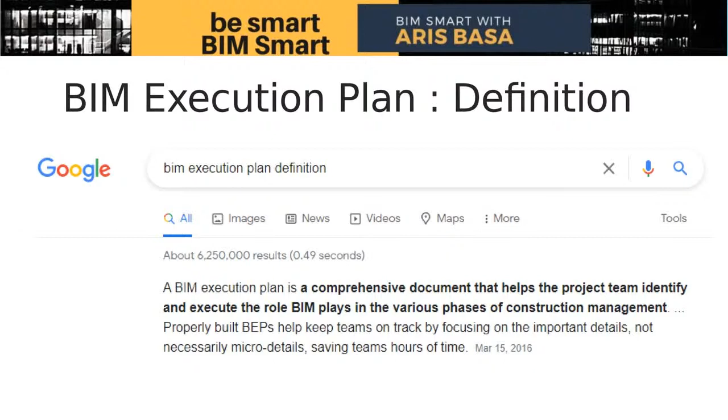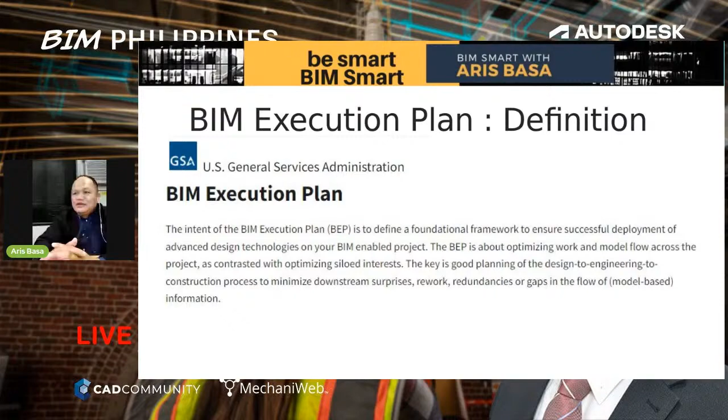Let's continue. Let's not be unfair, not just looking at Google. So if you can see, I've referenced the U.S. General Services Administration, stateside.

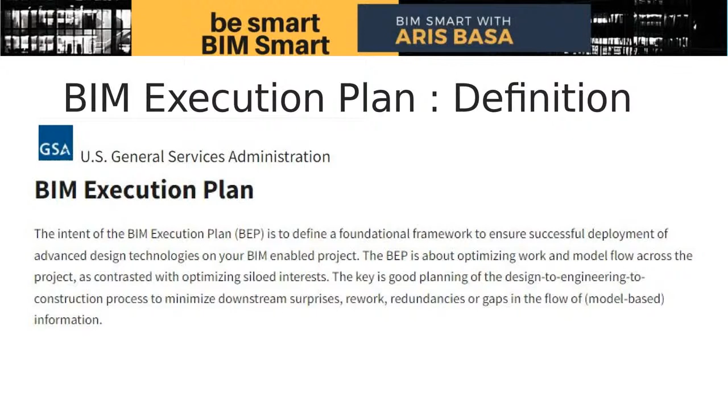They define BIM execution plan as a foundational framework to ensure successful deployment of advanced design technologies on a BIM-enabled project. The BEP is about optimizing work and model flow across the project. The key is good planning of the design to engineering to construction process to minimize downstream surprises, rework, redundancies, or gaps in the flow of information. Well said, from the U.S. General Services Administration.

Let's continue. Of course, if you've referenced US, you have to reference UK as well. According to the UK BIM Alliance, which is the main BIM body in the United Kingdom or England, the BIM execution plan is a technical response developed by the project delivery team.

A project delivery team is composed of, one, the owner or the owner representative. Second is the consultant or consultants, which can be the program management consultant, and there could be another construction management consultant. The third one is the builder or the main contractor.

So it addresses the requirements set out in the employer's information requirements, EIR, and confirms the supply chain's capabilities on how and when the project information is to be prepared, by whom, and using what standards and rules in the project. It is mentioned further that it is referencing PAS 1192.

It is now called the ISO 19650. And it further says that the structure of a BEP will usually be based on an established template. A keyword here is templates.

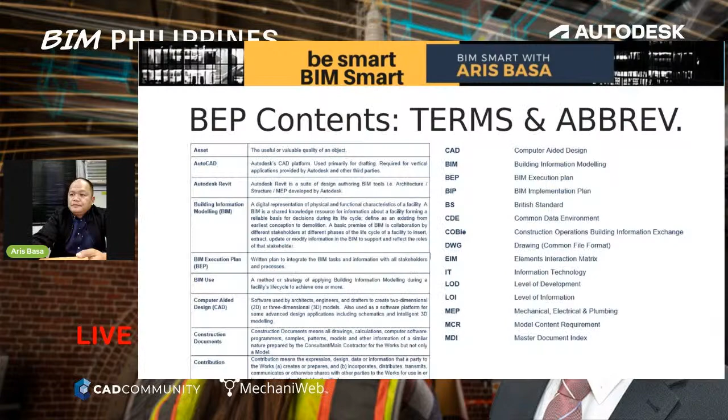So let's start with the contents, the terms and abbreviations. If you're a BIM guy, you've been working on a BIM project for quite some time now, you must be familiar with these terms.

So let's say, for example, the asset is the useful or valuable quality of a project, of an object. You have the construction documents — you know the meaning of these documents. Usually, architects and engineers who have been working in construction are very much familiar with the terms that will be used in the project and the terms that will be shown in the BIM execution plan document.

You know, the abbreviations will be there. CAD, BIM, BEP. Sometimes BEP, BIM execution plan, is also called BXP — it depends on the country. Sometimes it's called BIM PMP, BIM Project Management Plan. But all the same, these are all the same documents comprising all of the strategies, the relevant documents, the standards that are or will be used in the execution of the BIM for a construction project.

Okay, let's proceed. So, in the introduction, the purpose of the document will be clearly identified.

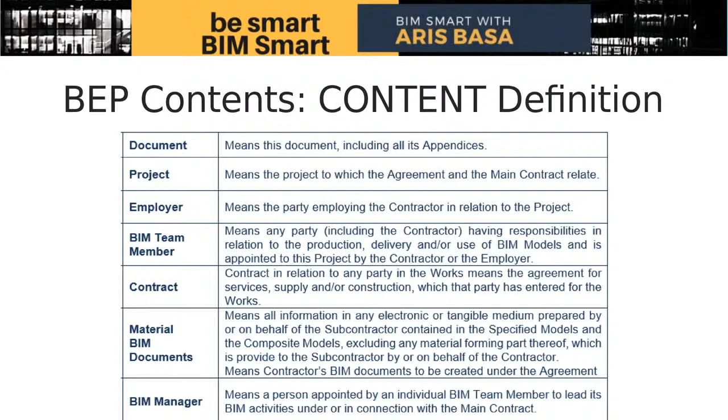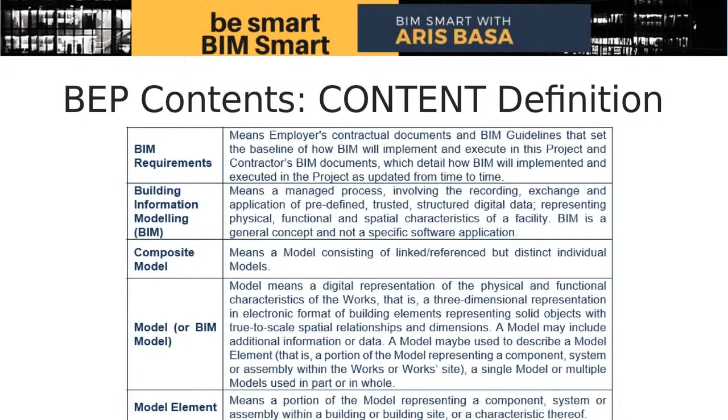Yeah, in the content definition, it is important to define the specific terms that are included in the BIM process. So you'll see that when we say document, it means this document, which is the BIM Execution Plan. And when we say project, the project is referring to the actual project that you are working on. And further, these are the other terms that are usually used or must be shown in the contents of the BIM execution plan.

So let's just define a little bit on the BIM manager. The BIM manager usually leads the BIM team, and he is managing all levels of BIM development. He will be able to produce the general BIM implementation plan. Let me just insert this: for BIM execution plans, usually for construction projects, there are two types of BIM execution plan. One is the pre-contract BIM execution plan.

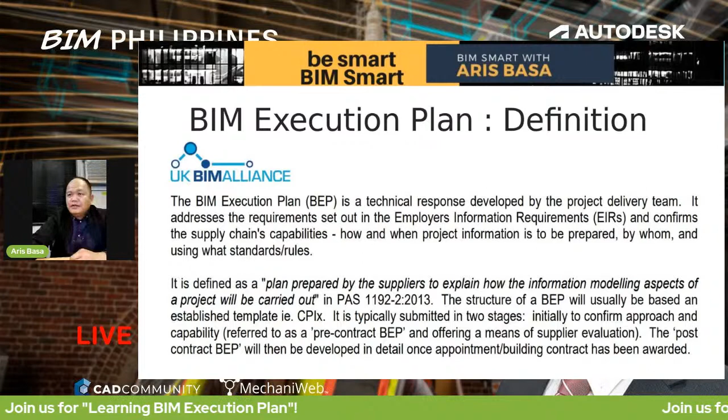Let me go back to my third slide. Yeah, here it is mentioned in the UK BIM Alliance definition of BEP that it is typically submitted in two stages. Initially, to confirm approach and capability, which is referred to as the pre-contract BIM execution plan. The request for a pre-contract BIM execution plan is usually sent out by the building owner or the consultant to the various companies who will be tendering for the project, who will be bidding for the project.

So usually this pre-contract BIM execution plan is a short document, not as detailed as the post-contract BIM execution plan. In my company, what I normally do is I summarize what will be our approach in the execution of the BIM project. Usually, this will be several paragraphs, which is 2 or 3 pages. That would be enough as a pre-contract BIM execution plan.

You just have to make sure on how you will be able to execute BIM for the project that you are bidding. And then, if you win the project, the BIM execution plan that you will be doing is now the post-contract BIM execution plan, which we are discussing right now.

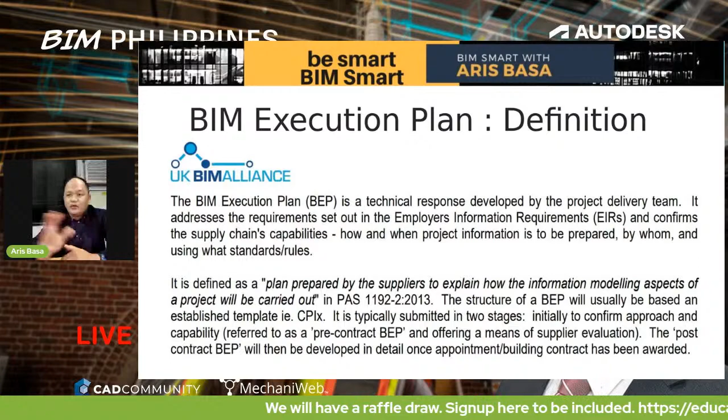Let's go back. Let's move ahead to our roles and responsibilities. We also have what we call BIM leads. Sometimes the BIM leads are based on the disciplines. So there can be a BIM lead for the architectural, structural, interior design, sometimes for the landscape, and of course for the MEP. Similarly, the BIM lead would always have his BIM coordinator.

The BIM coordinator is a guy who can coordinate all of the disciplines. He's like the big support, the big right-hand man of the BIM manager. This is when the project has enough budget to hire a coordinator and a BIM manager as well. In the projects that we have, usually we don't have the BIM coordinator anymore. The BIM manager is working as the BIM coordinator as well.

So you have the BIM engineers. The BIM engineers are basically the discipline engineers who know how the BIM process is executed. And you have the BIM modelers. These are the BIM guys who are hands-on in producing the models and also hands-on in making the necessary shop drawings and as-built drawings for the BIM project.

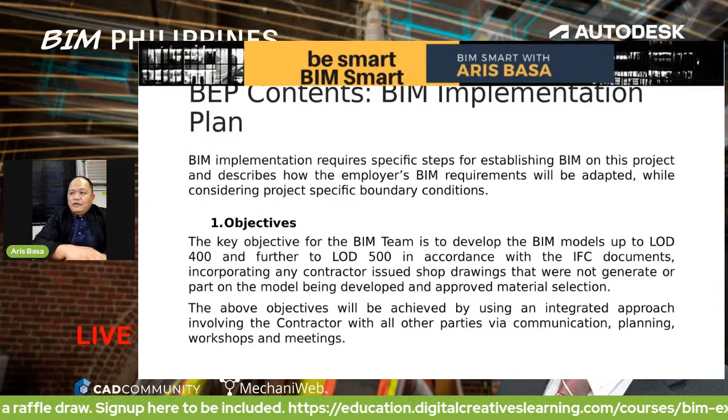Let's continue. So we have also what we call the BIM implementation plan. Let me just read the contents of this. BIM implementation requires specific steps in establishing BIM on the project and describes how the employer's BIM requirements will be adapted while considering project-specific boundary conditions. The objective of this is to develop the BIM model up to LOD 400. So this is specific to the project.

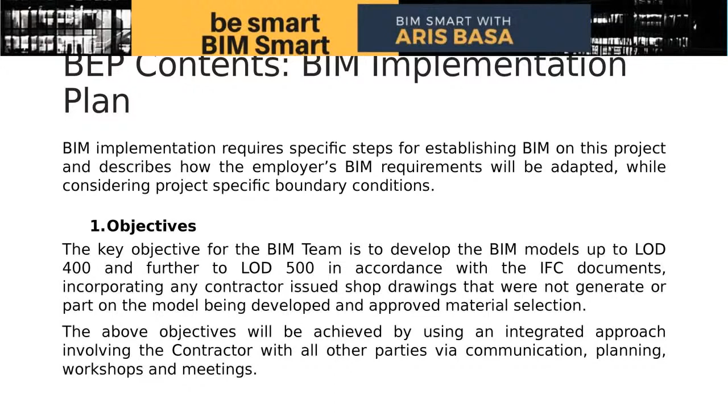For the reference project that I use for this presentation, the task of the BIM team is to develop up to LOD 400 and 500, meaning we already received an LOD 300 model from the designer. In many cases, specifically in the Philippines where BIM is not yet widely used, the consultant or the owner will hand over CAD files for the project. Then the task of the BIM team would be to develop LOD 300 models, 350, 400, and up to 500. So mas maraming trabaho for the BIM team in cases where BIM was not used in the design stage of the project.

So as part of the BIM implementation plan, we have to be very clear on the contents, meaning the settings that will be used for the project. We have to identify the language, if it's going to be done in English, in Urdu, in Arabic or whatever. It has to be clearly stated in the project language.

There's the splash screen. Ano ba yung splash screen? Splash screen is usually the first image that you see when you open a BIM or a Revit project. Usually it will contain the logos of the owner, the project, the consultant, and the contractor, and then it will contain several information such as the model file name, the Revit version, etc.

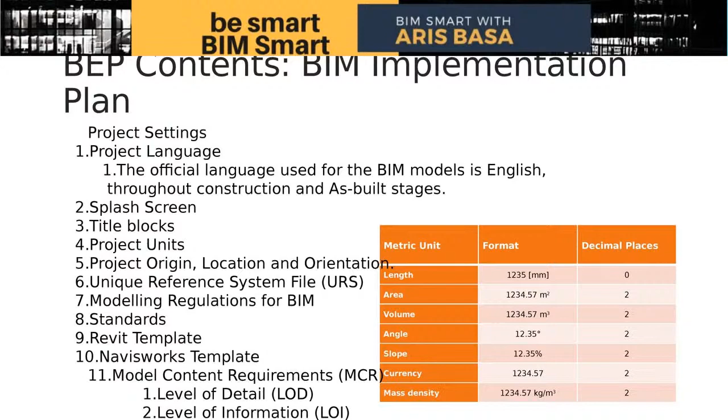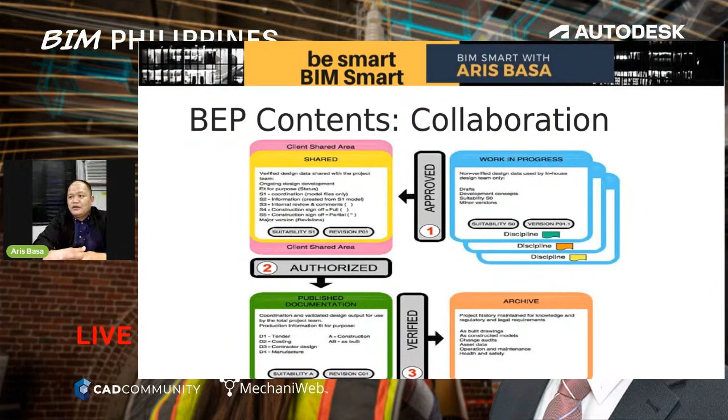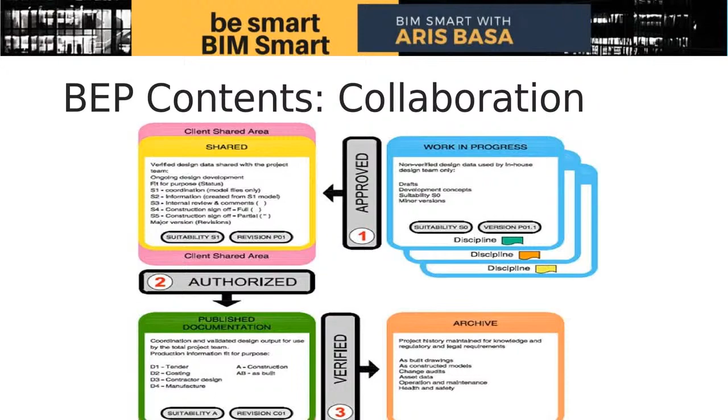Yeah, this is a map showing how we are doing the collaboration of the project. So usually when a work in progress model is approved, then it will be shared to the various entities, the consultant and the owner. If they authorize it, then the document will be published. So the published document is usually the document that will be used in the construction. So after it has been verified, it will be archived and will be used as built for further reference.

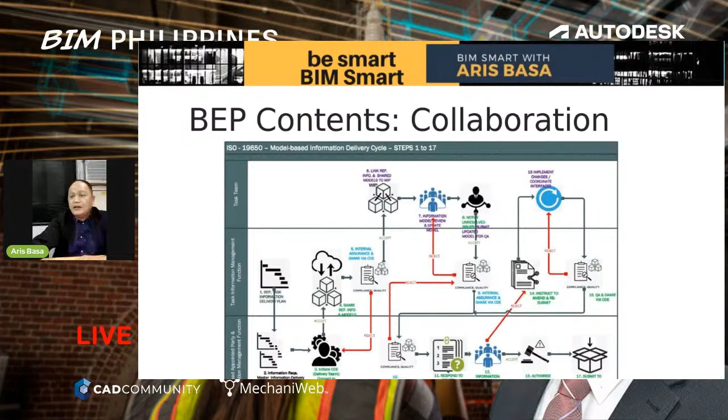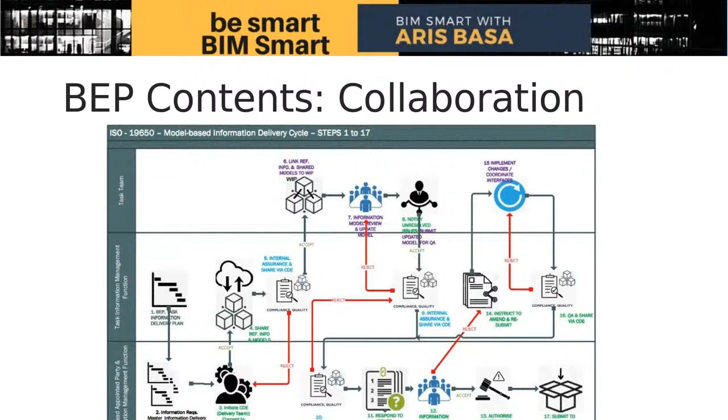This is another process showing the model-based information delivery cycle. It's a 17-step process. This document is taken from the BIM forum. So they might have a newer version of this, which is combining other aspects or other processes. But so far, this is what I'm using in my project.

So we are also defining the contents of the project browser for the project. We have to be very clear on what will be the name of the floor plans that will be used. There will be standard naming conventions for the drawings and for the views and even for the sheets. Now, this has to be very clear at the beginning of the project so that we don't waste so much time in renaming views and renaming sheets in the later part of the project.

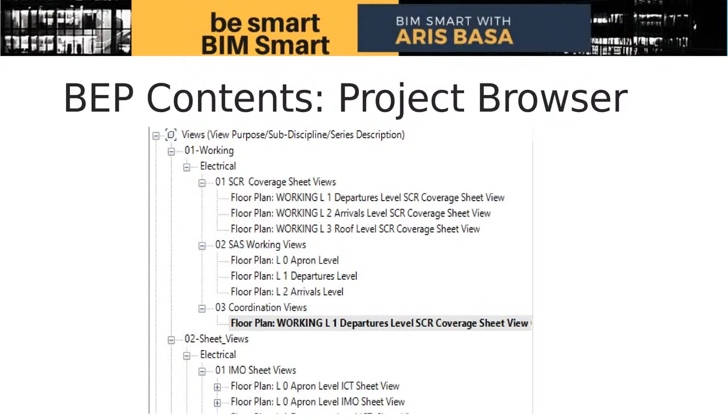And most BIM managers and BIM experts are using Dynamo scripts in preparing these documents, because usually this could be a very detailed document that is better done using Excel, and then incorporating it in Revit using the Dynamo plugin. For those who are Dynamo users, you are very well familiar with this process.

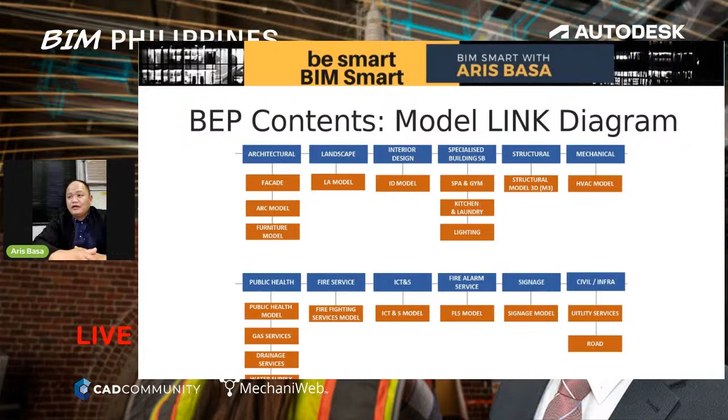Also, in the BIM execution plan, we have to identify and have a clear definition of how models are linked in the project. For example, for the architectural model, you will know what are the models that you need to link for you to have a proper architectural document. So the facade model, you need to include it. You have the architectural model and furniture model, and so forth and so on. Similar to, let's say, for the mechanical, you need to put on the HVAC model if you want to see the engineering design of the project.

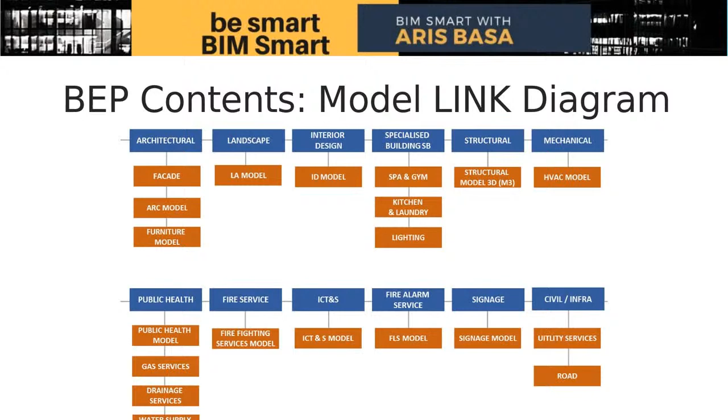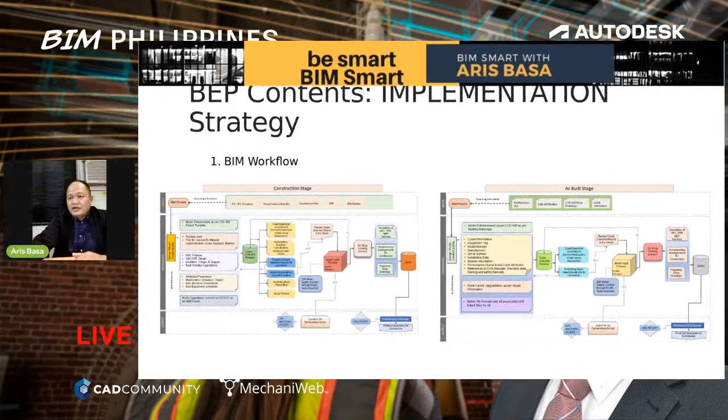Okay, so this is a BIM implementation strategy. It's divided into two workflows. One is shown here on the construction stage, and the other one is during the as-built stage. These workflows are suggested by the BIM forum as well, but depending on the project, these workflows can be modified, can be simplified, so that the work can be straightforward. If there are less BIM staff and less construction management team on the project, then these workflows can be very simple.

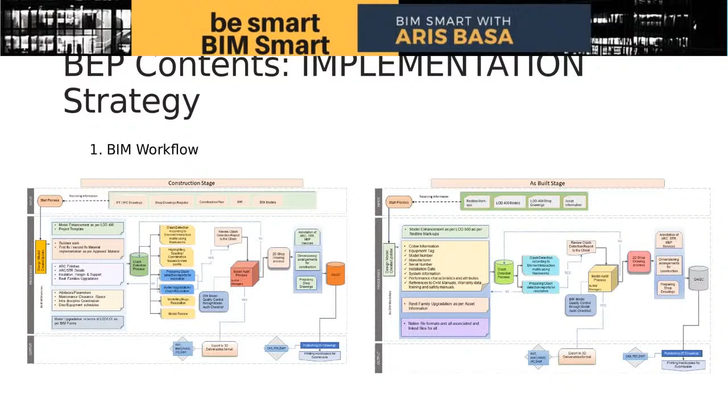So also in the implementation strategy, we need to define the 3D coordination and the clash detection process. Let me just read what is shown in your screen. Although the design authoring process aims at producing consistent design through avoiding clashes by establishing a collaboration environment among design teams, 3D design coordination is still required.

Of course, we are not perfect, no? The people who are doing the BIM are still human beings. We are prone to mistakes. So we still need to talk. We need to collaborate. We need to tell this guy that you have to adjust. Have to tell me if I have some mistake so that I can adjust. This is the collaboration process within the project.

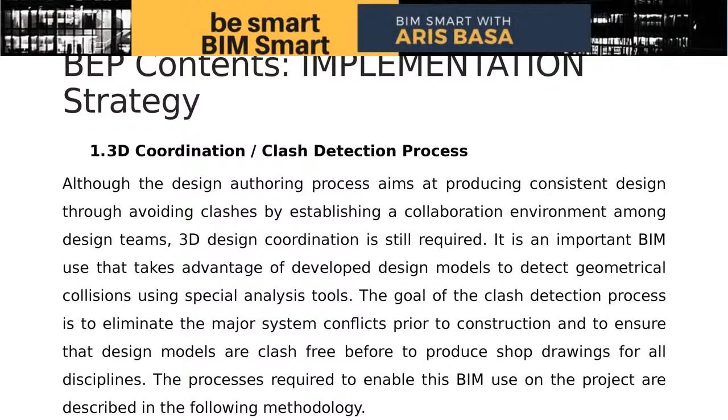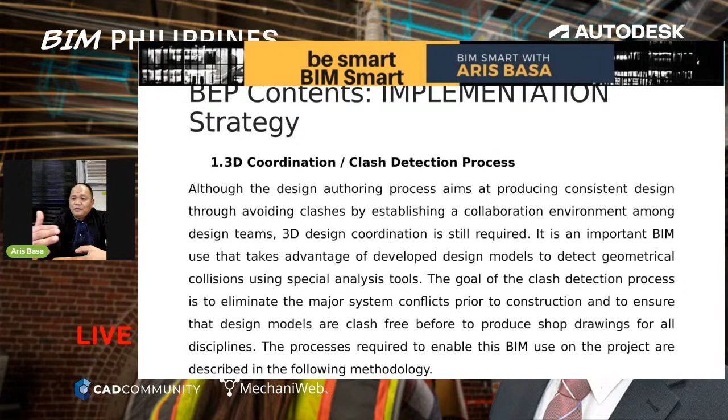So the goal of the process is to eliminate the major system conflicts. For example, you don't want to build the curtain wall which is clashing with your slab and with your columns. These major clashes have to be very well defined. You don't want your AC ducts to be hitting your columns. You want them to be properly mapped out in the three-dimensional model.

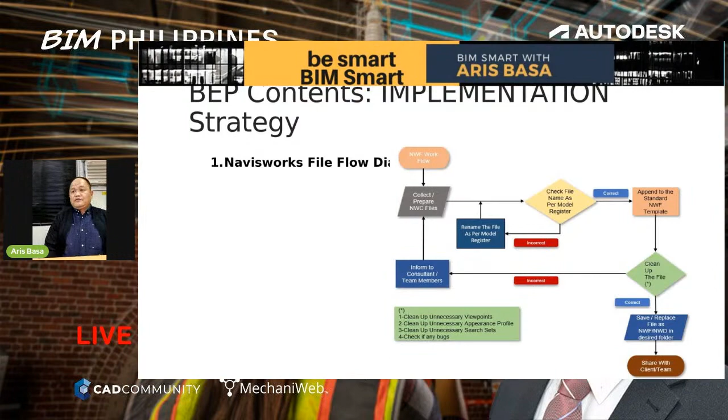Just to clarify, for those who are beginners in BIM, there are two major types of BIM software. One is the BIM authoring software, which is the likes of Revit, then ArchiCAD. You also have AECOsim, among others. These are the tools that you use in creating the model.

The other one is Navisworks, which is a viewer for the project. Not just the viewer, it is also used in clash detection. So it is also used in quantity survey and used in preparation of the 4D model, or what we call the construction sequencing model, among others.

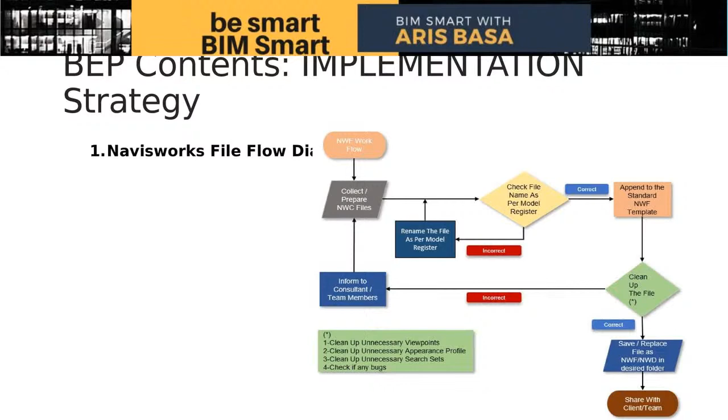We can define the best location for the tower cranes. We can define the best locations to place the temporary site facilities, and we can plan where to put the boundary fences and the temporary roadworks using the BIM software. This also has to be defined inside the BIM execution plan document.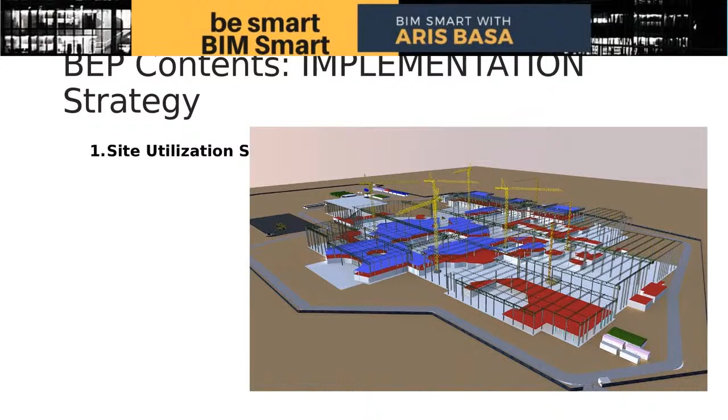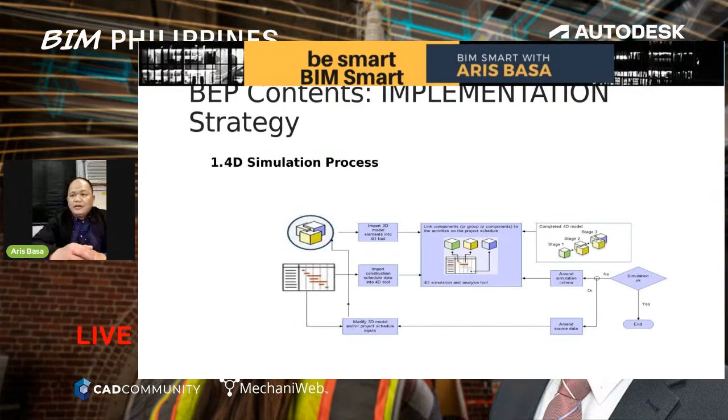So, as I've said earlier, for the simulation, or the sequencing, there is a process, and it is shown in this process. The 4D process requires two things. One is the model, which is developed by the BIM team, and the second one is the program, or the planning information. It can be a Primavera software.

It can be a Microsoft Project software that clearly defines the stages of the project and what is to be completed during each stage. All of this will be incorporated using the Navisworks software, and we'll be able to produce on a monthly or weekly basis the actual construction progress and what we call the planned progress for the project.

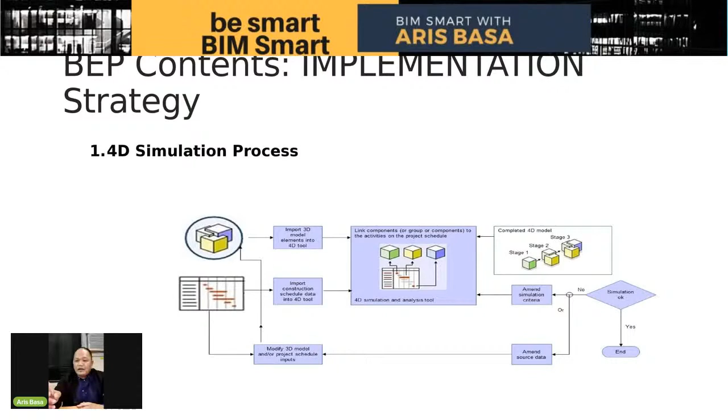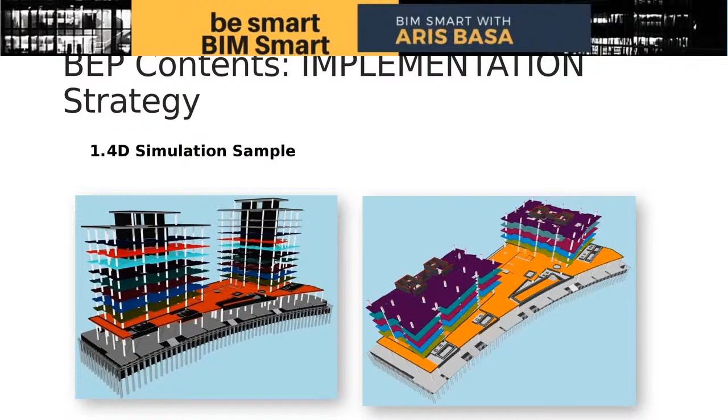I think I have an image showing an example of that. Yes. So these are just some examples of a 4D submission. Usually a 4D submission is submitted as a video file, showing how the project has progressed from day zero up to the current time, and how the project will progress from the current time up to the completion date.

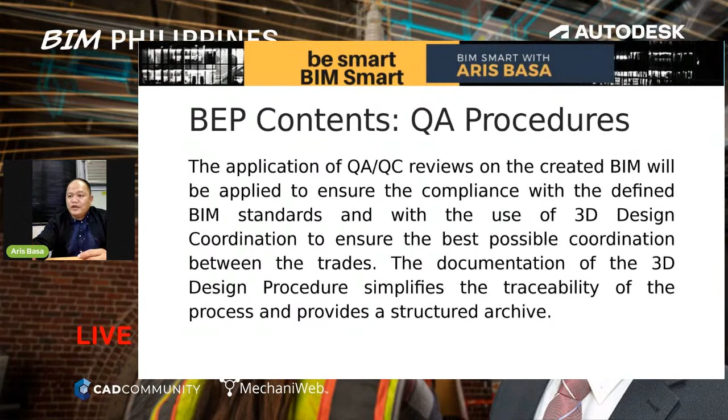Of course, we'll have QA and QC procedures for the BIM execution plan. This QA/QC process is usually done by the BIM team, not the QA/QC team of the project. QA/QC reviews on the created BIM will be applied to ensure compliance with the defined BIM standards, and 3D design coordination is used to ensure the best possible coordination between the trades.

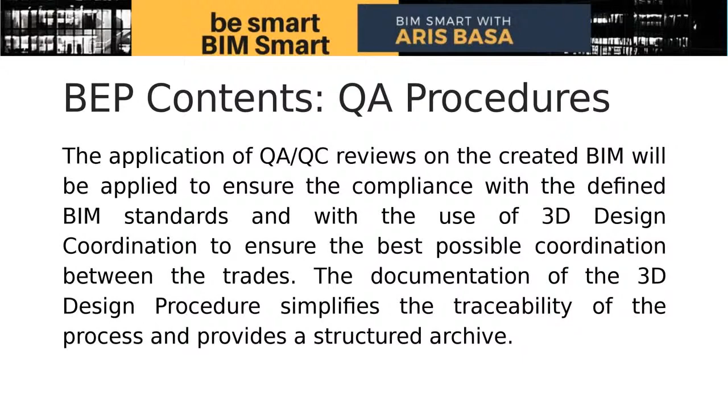The documentation of the 3D design procedures simplifies the traceability of the process and provides a structured archive. So it is very important that we have these QA/QC procedures, and they will be defined in the document. You will have all the checklists and see the compliance of each part of the model, and that is where the BIM manager or BIM coordinator can create comments, which can be further improved by our BIM authoring team.

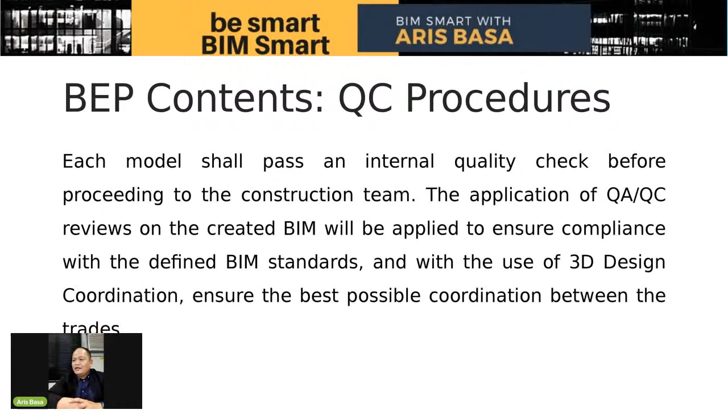In the QC procedures, each model shall pass an internal quality check before proceeding to the construction team. We want to make sure that all our models and all the 2D construction drawings we produce are properly checked before we give them to the construction team. Otherwise, it is going to be a big problem. Usually, our construction team will build as they receive. We don't want to create issues for the construction team. We want to work in a properly and well coordinated manner.

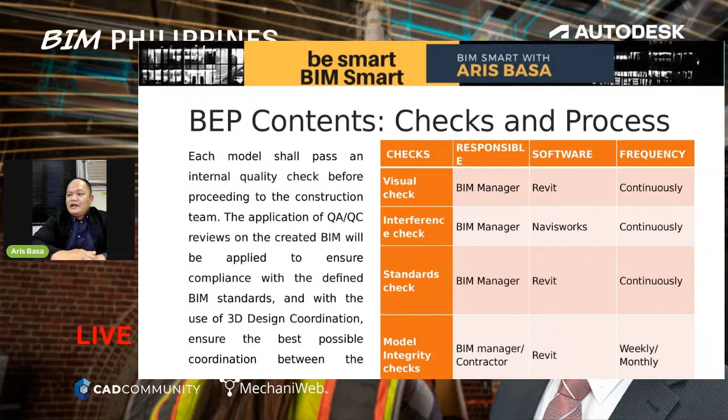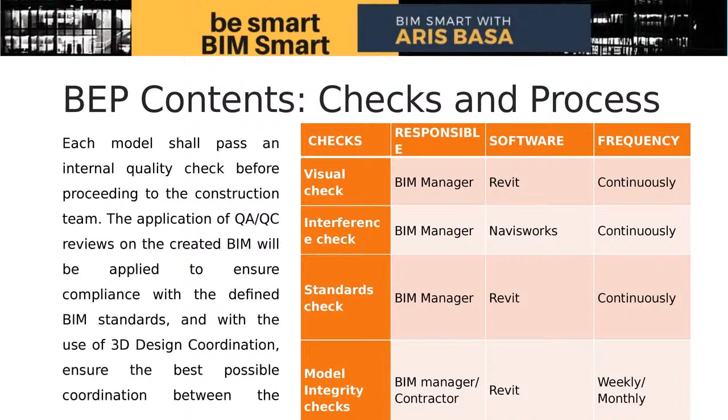This slide is showing you the checks and processes done on the project. Usually the visual checks and interference checks are done by the BIM manager using Revit and Navisworks software on a continuous basis. Since these are live documents, the BIM manager is a busy guy doing all the checks for all of the projects.

You can say the end product of a BIM execution plan are the deliverables. This is where the BIM team is judged. You should be able to deliver on time and with the specified and expected detail and quality. So this is where the models are submitted. At the BIM execution plan stage, we are showing what will be submitted.

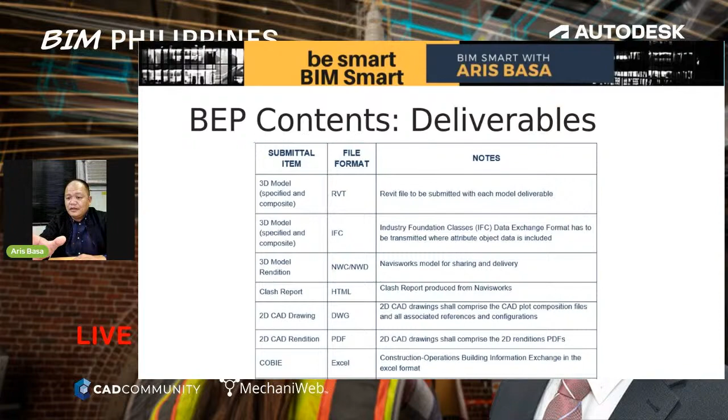Now, as the project progresses, we will be agreeing with the consultant, depending on the project plan and timetable, on when and even how we will be submitting the project. If we say that the initial model will be submitted through the cloud, it will be defined there.

No submission through email or on a USB disk will be done. Everything will be done through the cloud. This has to be defined in the deliverables list.

It is also very important to include if there are renderings to be done. It is important that these renderings are enumerated. Why? Because as you know, renderings take time. If you commit to the project that you will be submitting 10 renderings for each of the buildings, if you have many buildings in one project, then you have to be able to manage that properly. As we know, high quality renderings take time.

In other projects, and actually in the last two projects that I am working on, we have what we call the asset information model. This is a document that is very detailed and includes all of the necessary properties of each part of the building. For example, down to the ironmongery of a door, and the locks. We need to identify what the properties of this element are, who is the supplier of this element, how much it costs, and how many spare parts should be included for each of these parts.

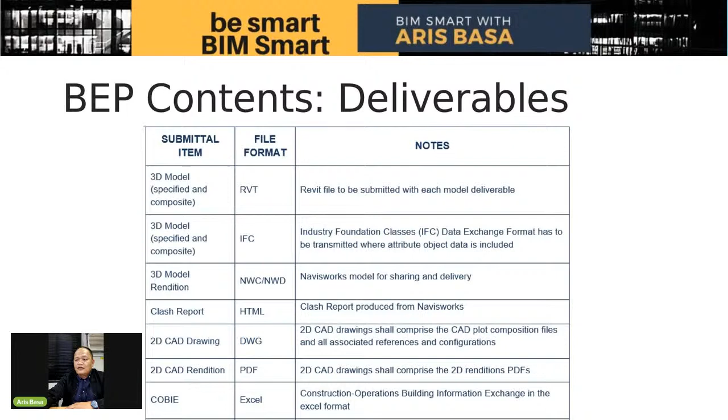These are very detailed documents that are done at the tail end of the project during the closeout. So those are asset information models where each element of the building has its asset tag. For example, furniture will have its own asset tag. Mechanical equipment will have its own asset tag. Electrical equipment and plumbing equipment will all have their own asset tags. These are combined in what we call the COBie documents.

So hopefully we are good. I don't know how much time I've spent already. Do we still have time, Joe Mark? Absolutely, sir. We still have just a few more slides before we complete. Meron pa ba tayong question and answer portion? Yes, sir. After neto, we want you to focus muna on your presentation. But after this, we're encouraging everyone talaga to ask questions. Okay, sir, we still have time. Thank you very much. Go ahead po. Okay. Thank you. Just a few more minutes.

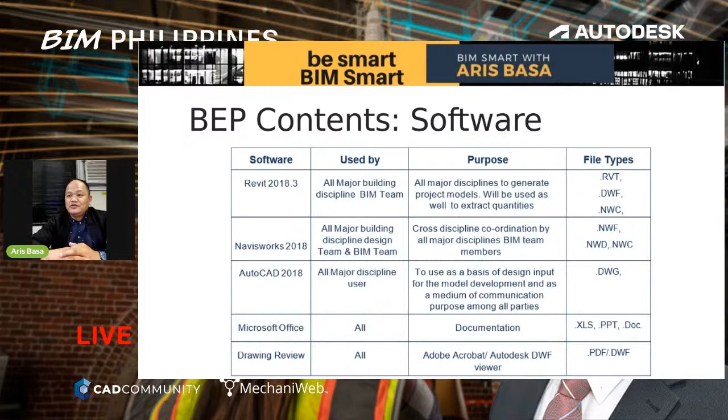This is now the software and hardware part. As you know, the software has to be defined in the BIM execution plan. If you say that you will be using the Revit 2018 version, you will be using the Revit 2018 version from the beginning to the end of the project. If you'll be using 2020 or 2022, it has to be written in the document because, as we know, Revit is not backwards compatible and buying software is not cheap.

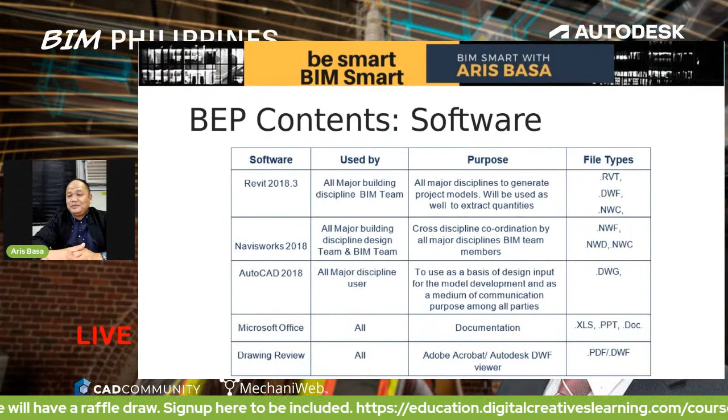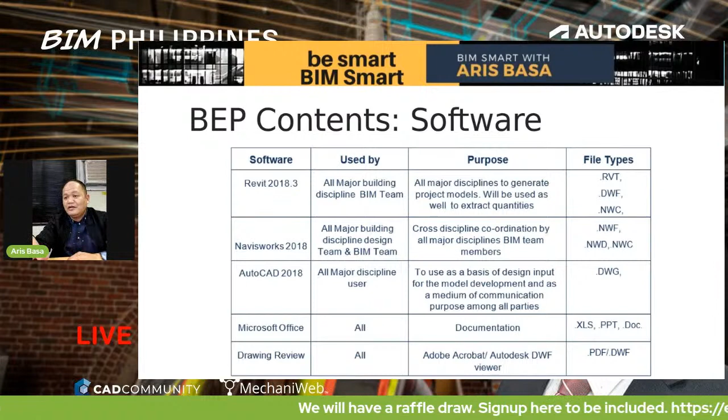But the good thing is, as far as I know, if you buy Autodesk software, it will give you the opportunity to download at least three versions. For example, if I purchase the 2020 version, I can download 2021 and 2022 as well, up to three versions of the software. Please correct me if I'm wrong on that.

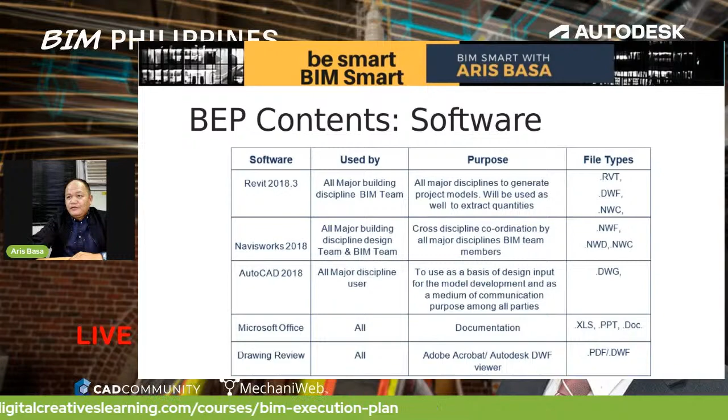And of course, you'll be having all these appendices as your reference. You need to identify your organizational chart, who the owners are, and who the people in the organizational chart are. And contact details; the splash screen sample should be there. The model content requirement should be there.

Usually, this includes the BIM manual, BIM flow chart, the element interaction matrix, clash detection templates, QAQC checklists, model audit checklist, BIM submission checklist, and a title block example. So these are usually included in the BIM document as an appendix. These are very detailed documents that are constantly updated during the course of the project. And for everyone's information, the BIM document is what we call a live document.

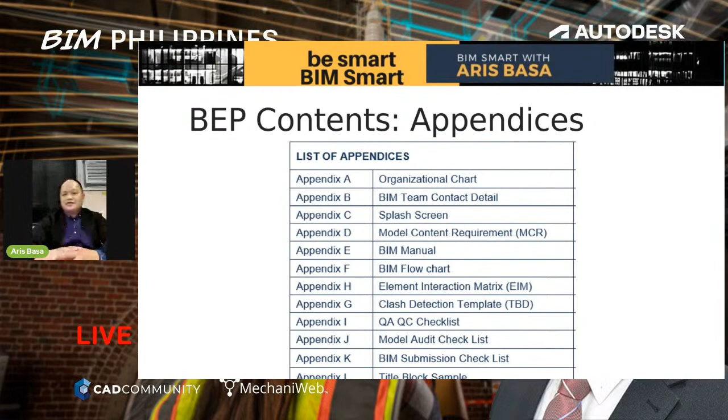And I think that's all that I've been able to share with you. I hope that you were able to brush up on your knowledge if you've been doing BIM execution plans before and haven't done it for a while. And I hope I was able to give you fresh knowledge for those who haven't done a BIM execution plan. So, once more, the floor is now open for your comments, questions, and suggestions.

Okay, Sir Aris, the first question is for the young ones: I want to be a BIM professional. How should I start? Start from the beginning, right?

Every race starts from the start line. So the start line will have to be first finishing your education. Finish your college degree, and while you are preparing for your board exam, include mastery of the software. But I think the young guys now, as early as their second year in college, are already doing BIM. And that is very good. But of course, it is different when you are working on a professional level.